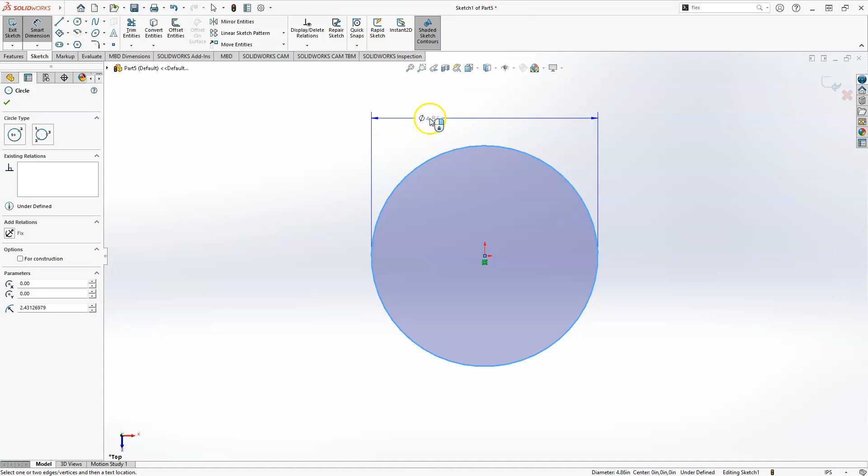Start by sketching from the top plane, create a circle with a 6-inch diameter. We are going to emboss it for 1/8 of an inch. Click OK, and then click on the top plane, go to sketch mode.

Another circle with a 1-inch diameter—that would be the shaft of the compressor. So we go to extrude mode and make it 2 inches.

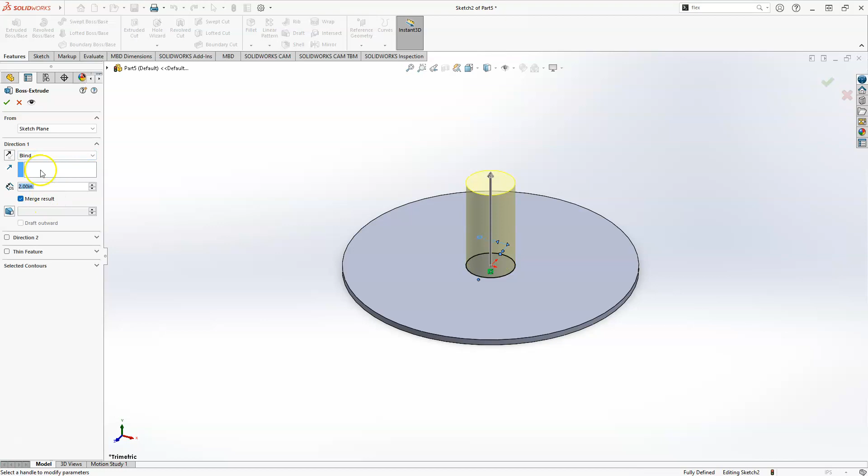Now again, click on this top plane—not top plane, top surface of the disk. Go to sketch mode, and here I'm going to draw a rectangle that's sort of angular. So from the drop-down of the rectangle shape, select a 3-point corner rectangle.

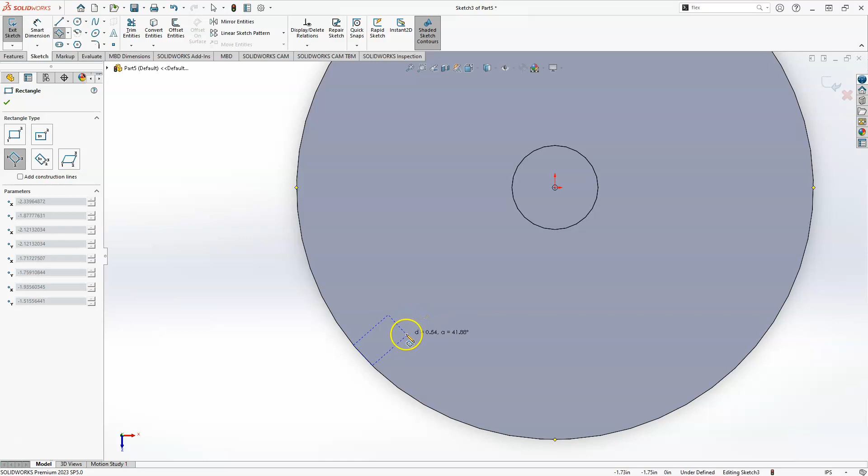Off of this I'm going to pick this one and then another. So the first two points would be on the perimeter of this circle, and the third point could be anywhere here. Now go to Smart Dimension.

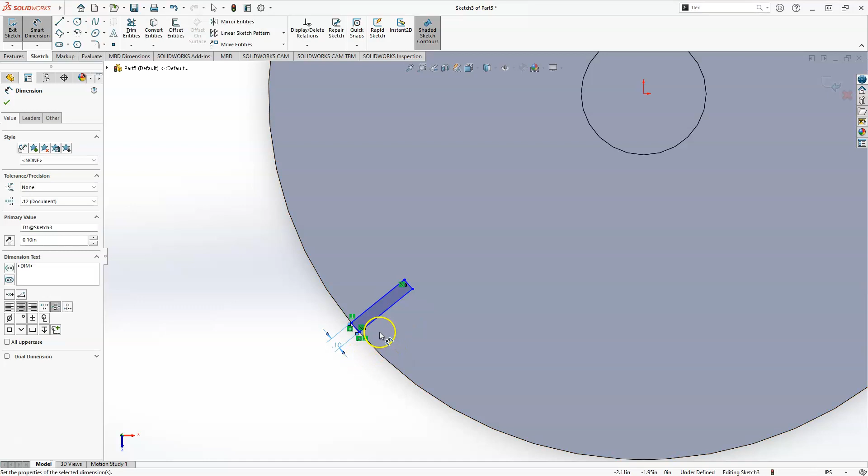I would like the width of this rectangle to be 1/10 of an inch. Hit escape, select this side—not the point, the side—and the other one, make it equal. So that would essentially be a square of 1/10 of an inch dimension on each side.

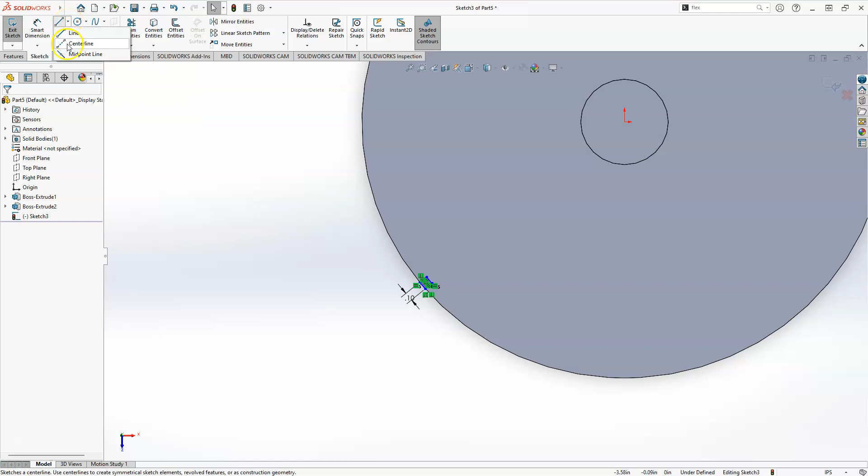Now go to the line and pick the center line. We would like to select the midpoint of this square and go all the way to the center of this circle.

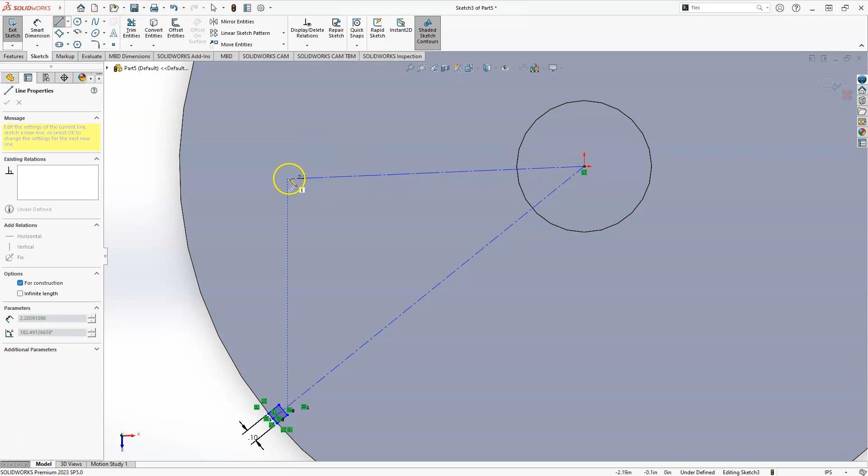Then another center line from the center, horizontal—see, it's horizontal—and hit this point of the circle. Now go to Smart Dimension. I would like the angle between these two to be 45 degrees.

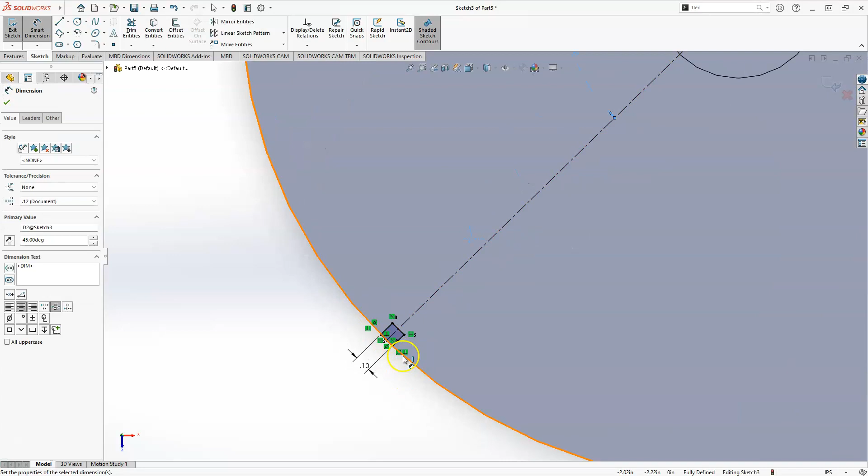Okay, now you have a fully defined sketch. Exit out of the sketch view, and you should have something like this formation.

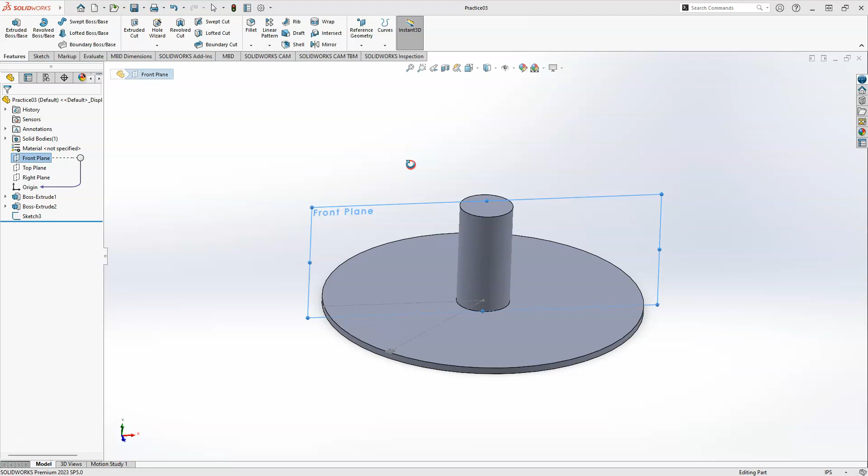Okay, we are going to select the front plane, go to reference geometry, select plane, and give it 1/10 of an inch in the forward direction. The front plane should be in the back. Hit OK. Now you have this plane here.

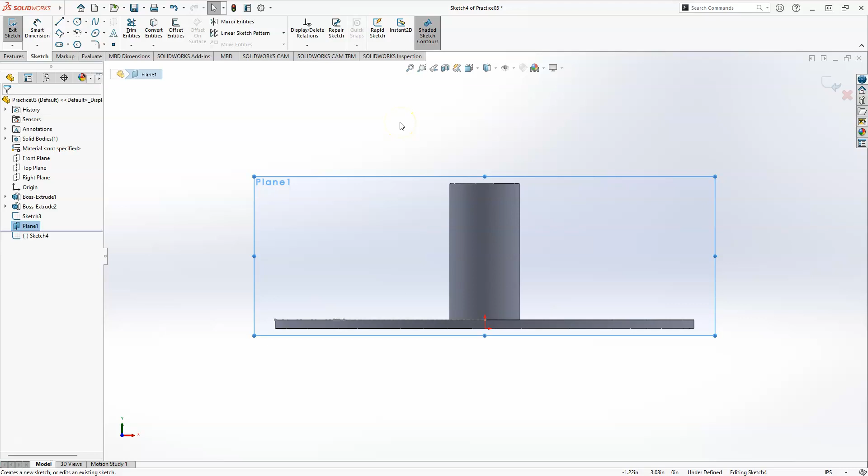Now select the plane and go to sketch mode. We are going to create a curve which would indicate the end profile of that. You will see the result—what is it going to look like?

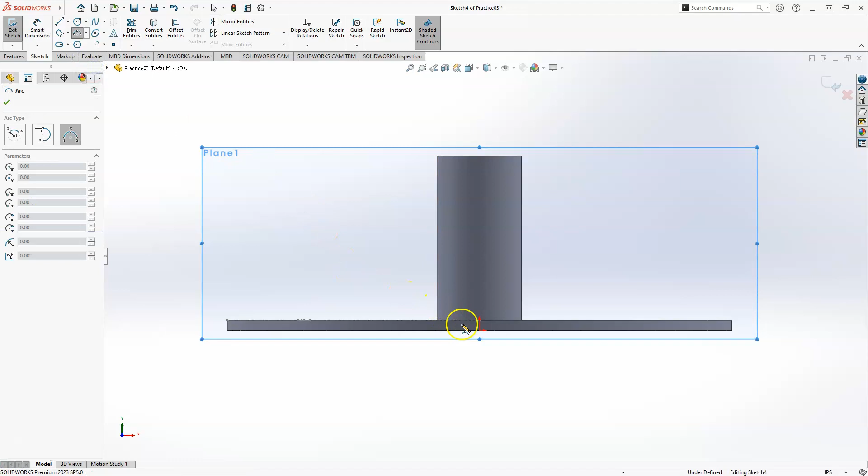So from the curve point, go ahead and select the 3-point arc, and then come here, select the point around here, and go all the way, select here, and give it some nice curvature at this point.

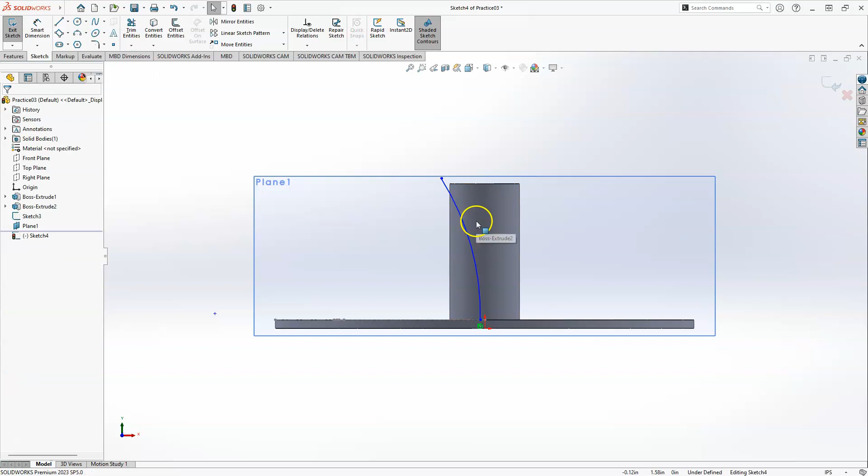And then we are going to create another curvature with 1/10 of an inch. So instead of creating another curve, you can select this sketch and go to offset entities, then give it 1/10 of an inch, and select the end cap option, and off of the end cap, pick up the line option.

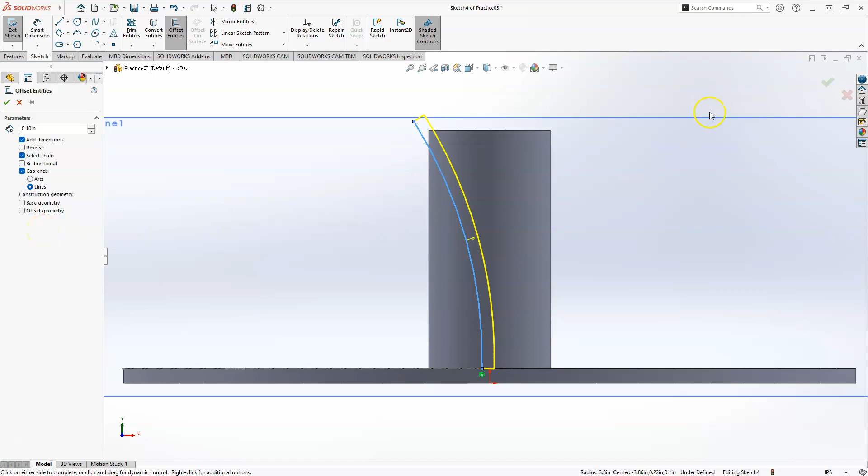Hit OK. You see that SolidWorks automatically creates a sort of cap at the end, and then all the way to here. Let's hit OK. Now we are going to give it some dimension.

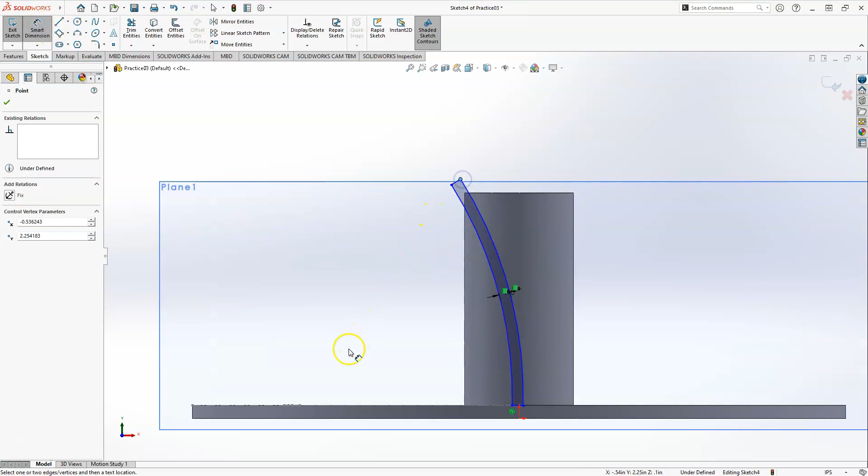I'm going to pick up the top and then this one and create it as 2.5 inches, and then make the radius of this curvature about 4.

What else is remaining to define it? Oh, the left and right. So what we are going to do is create a center line and make it vertical for construction, infinite, and put it right in the origin of the drawing.

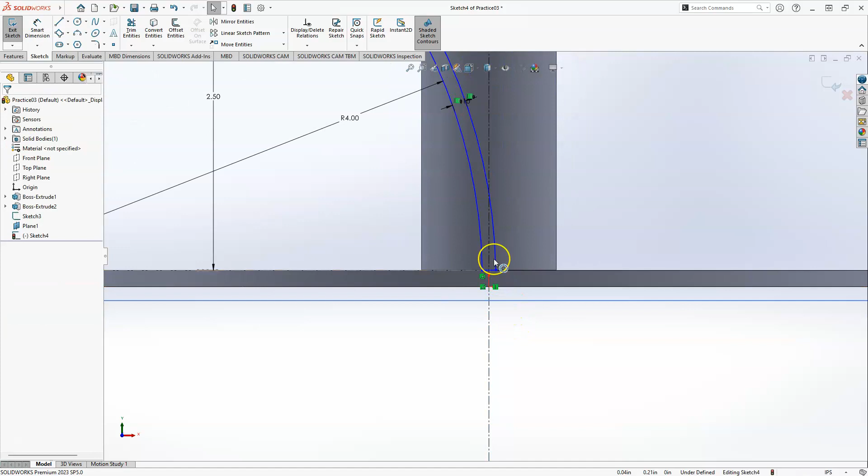And then we would like to create this line centered over this center line, so it crosses right about the center. What else is remaining? I think the radius is given.

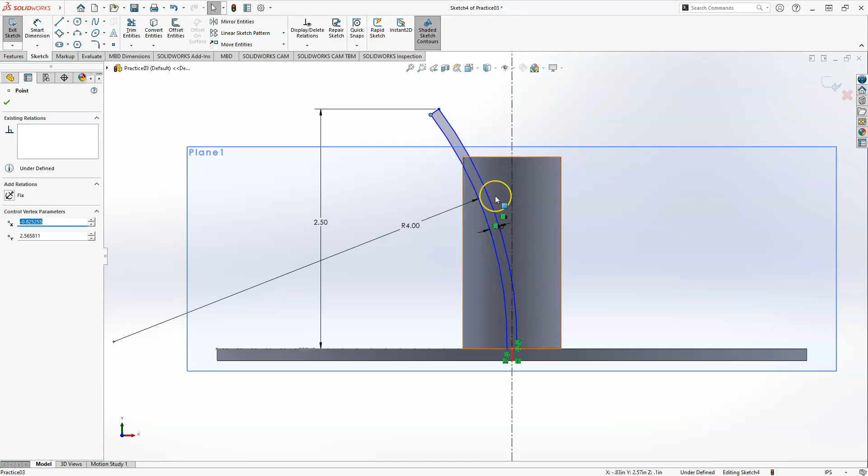Okay, this one, pick the center point, and this one—they should be coincident with each other. There you go. Now this curvature is defined.

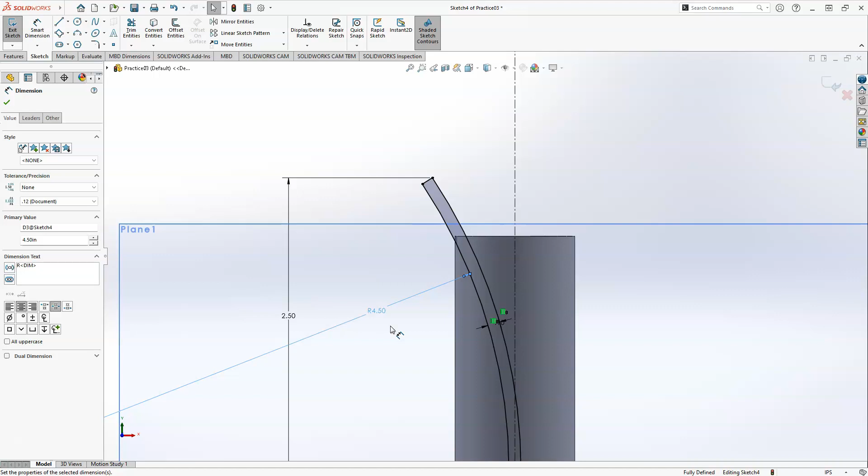I would like to create the radius like a 4.5 or maybe 4.25. Yeah, I want to make sure that this corner point kind of falls in the center of this curvature that we have. Okay, that should be good enough.

Now go exit back out of this sketch. We should have something like this.

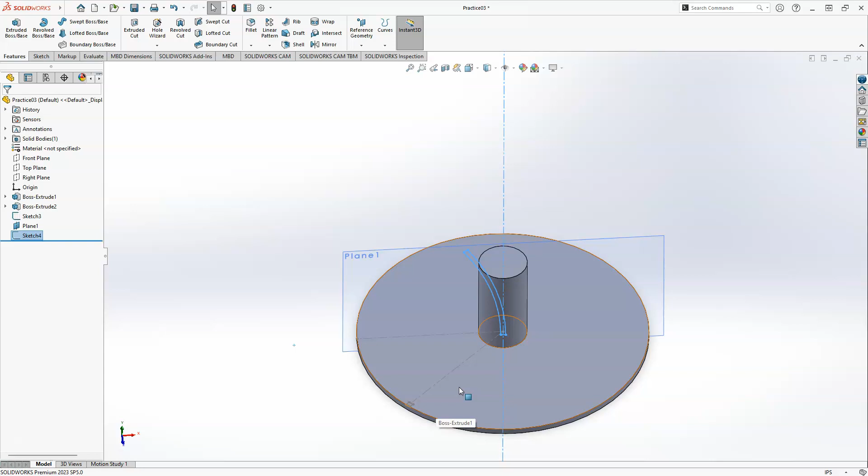Now I'm going to create a guide curve of this point. So what I would like to happen is I want this point to have a transition and reach out to this point. So I'm going to select the top plane and go to sketch mode, and for sake of better drawing, I shifted like rotated into a more 3D view.

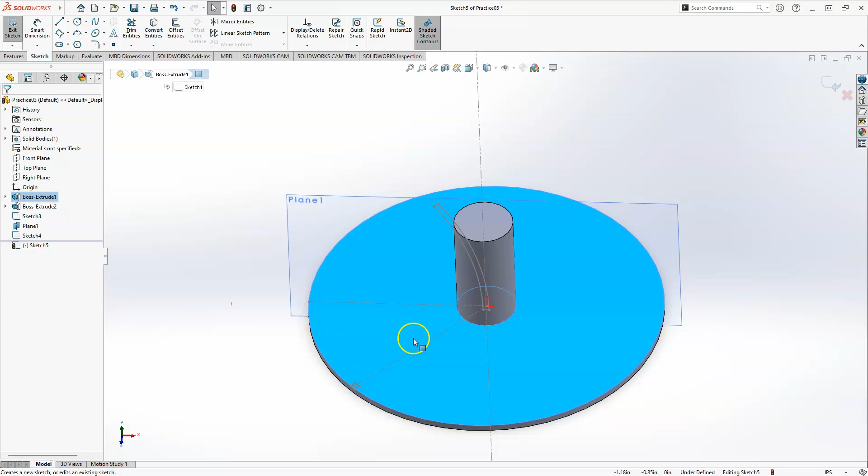You are still on the same plane but in an isometric view. Go ahead and select a 3-point arc, select this point and then another point on the profile, and give it a nice curvature here. I would like to give it a 2.5 radius, so make the radius 3, like a little more, or 2 inches. So 2-inch radius, and then it's fully defined because the radius and 2 points is given.

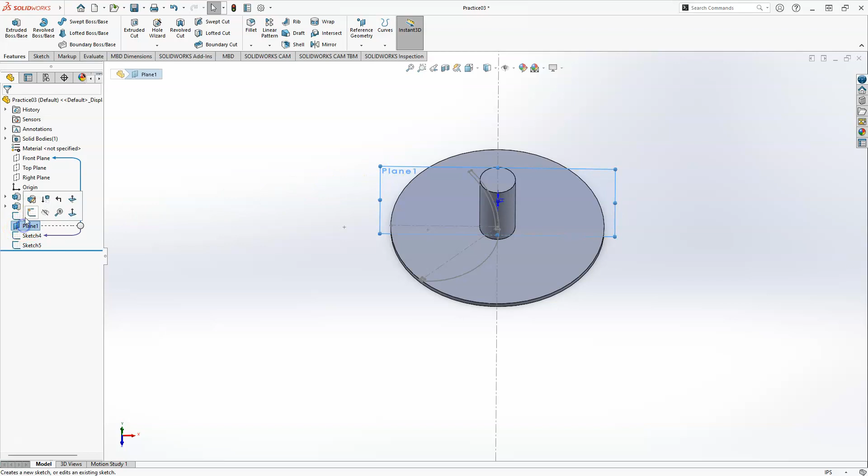Exit out of the sketch. Now go and hide this plane. So now you have two sketches on 2 different planes and a guide curve, which is the transition curve from one profile to another.

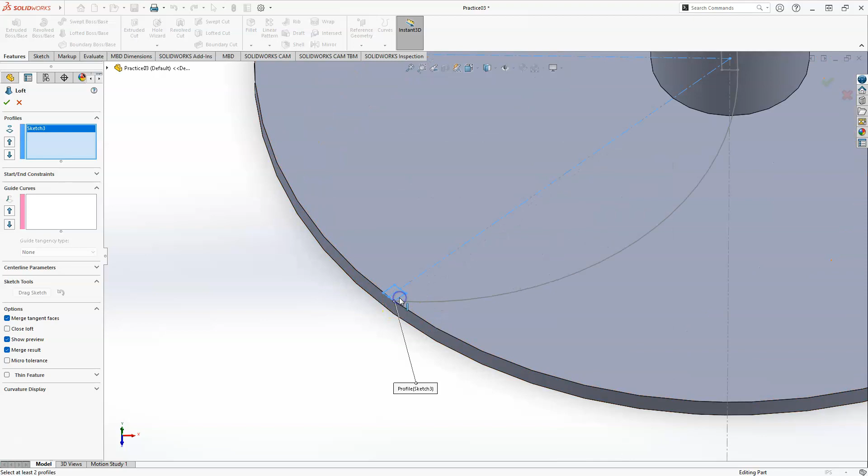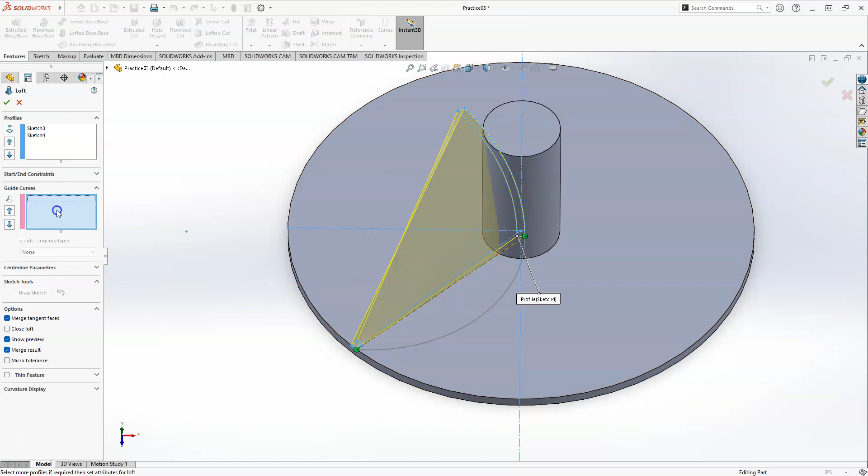Go and select Lofted Boss/Base, and for the profiles, select this sketch and this sketch. You are going to say this point is going to transition and reach to this point. But as you will see, this is straight and it's not something that we wanted. So in the guide curve, we are going to select this one. You will see it's going to make a very nice curve from one profile to another.

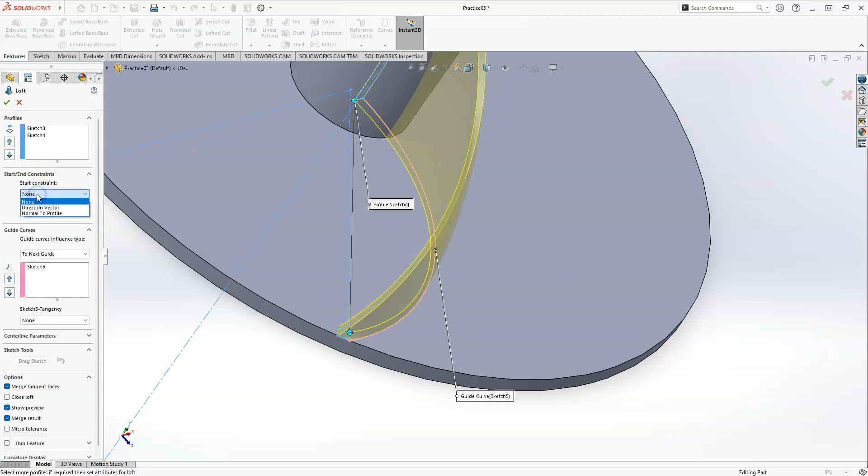So you can select sort of a constraint. Let's try it. For a start, if I select normal to profile, it's going to be here. It's going to get normal to profile, and for the end one, end constraint, make it normal to profile too - this kind of graph. So hit OK.

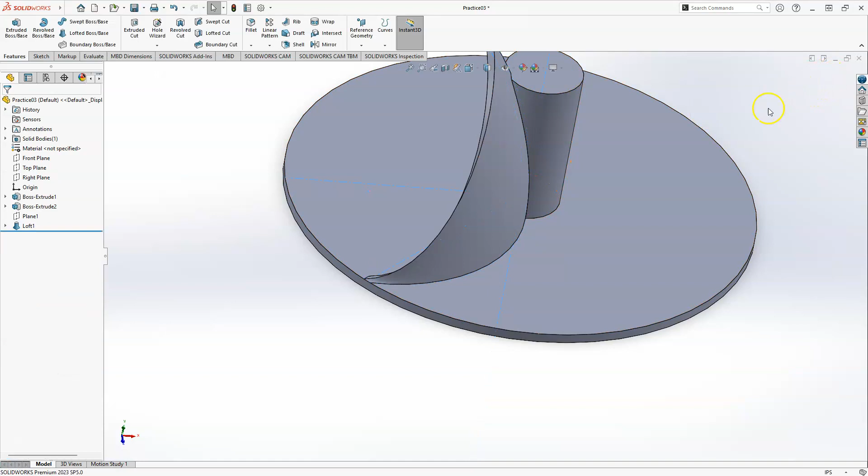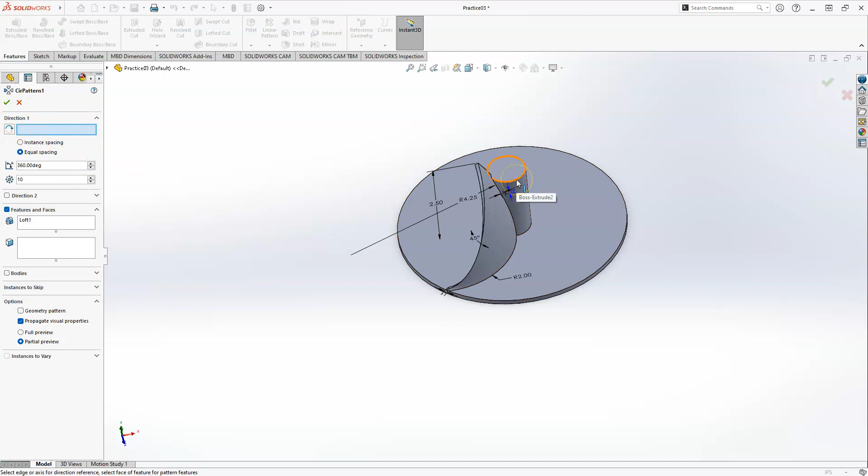And then you create one of these. Now we are going to create a circular pattern. Create loft feature, then go to this drop down. Instead of linear pattern, select circular pattern, and it will ask you for what is the reference for making that direction. You can select this circle on the top and make it 360 degrees and 10 instances, and essentially SolidWorks creates 10 instances of that body. Hit OK, and you have something similar to this shape.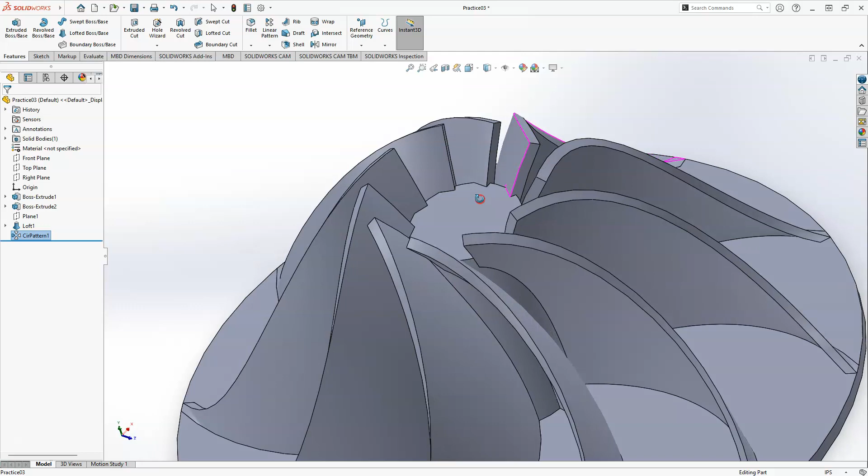Now we have to cut off the edge and make it nice and clean. So in order to do that, I would like to create a section view, and I go to here and create a section view. That gives you sort of what it looks like when you cut it, and the shape is nice here.

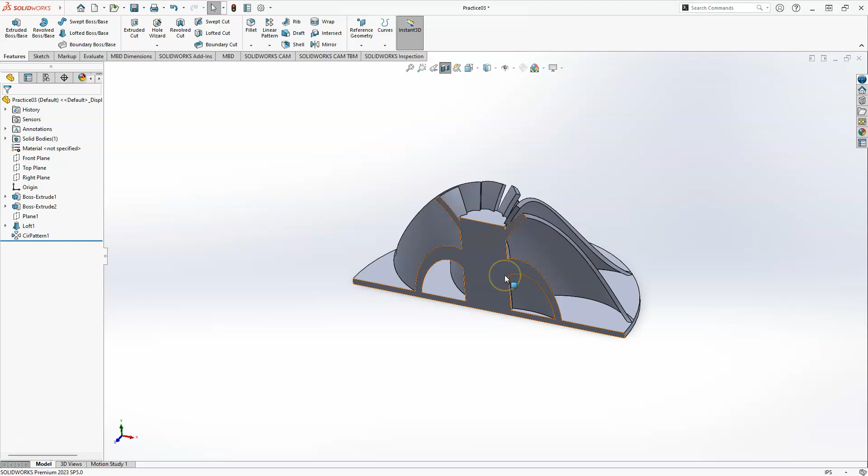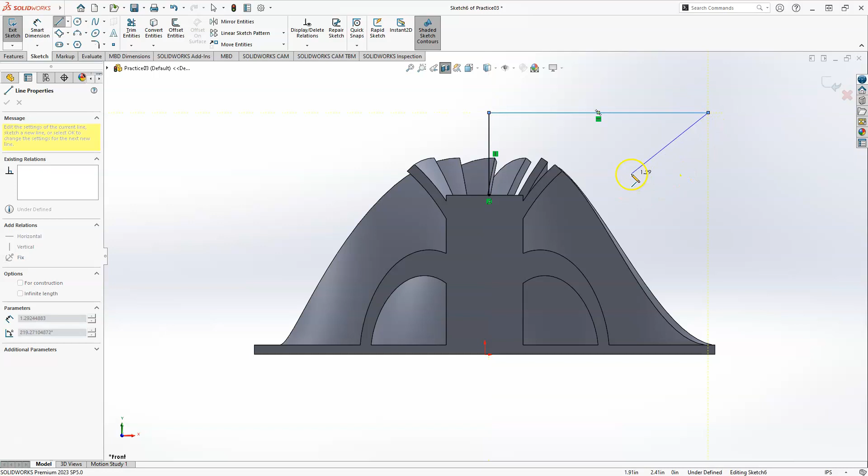So I'm going to create a revolving cut feature. I select the front plane, go to here, and I'm going to cut off all of these lines here. So what I would like to create a cut feature, I'm going to select line, and it's going to be from here to this one, then come here, then there is another line from here going to this point, right on the edge of this point.

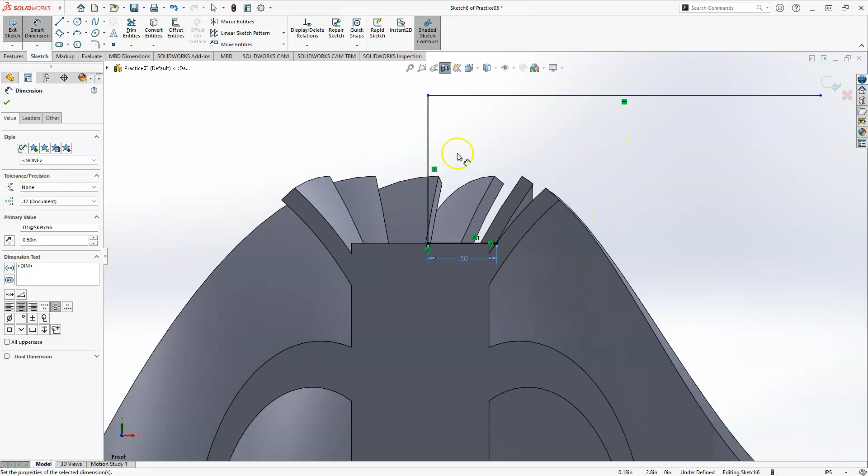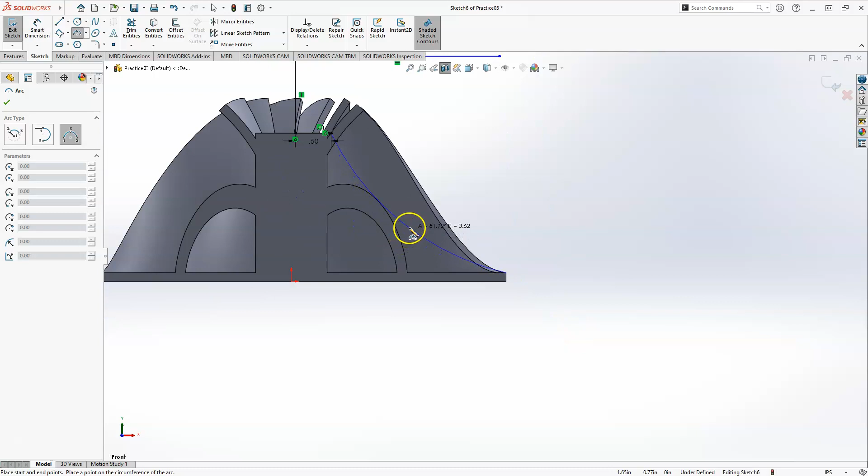But we should know that this should be half an inch because diameter is 1. Now I'm going to go to 3-point arc one more time, select the end point here, and I would like to come and cut it all the way to, let's say, this point, and give it a nice curvature like here.

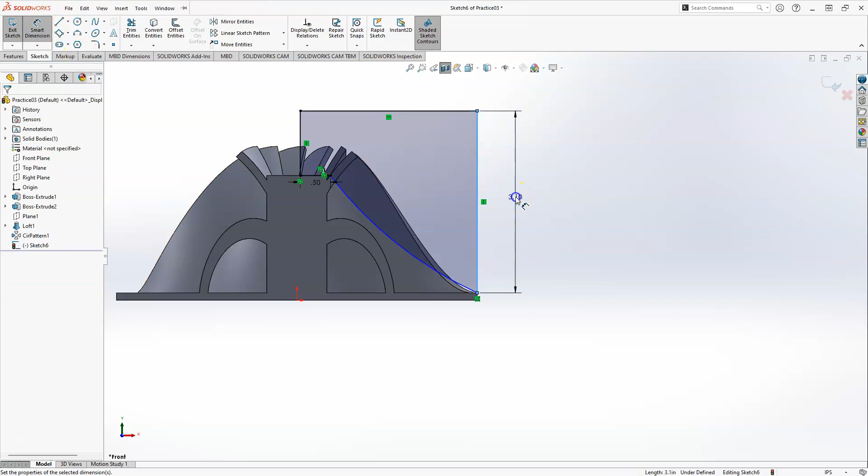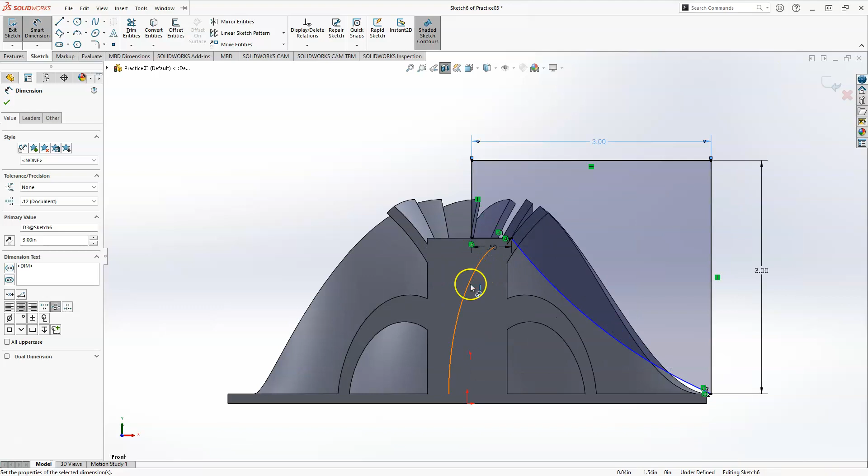And then there should be another line from here to this point, and then make this one vertical. You can give it some dimension to make sure that it's nice, like 3 here, and here would be 3, to make sure that it's going to sweep the entirety of this, since this is like 6 inches. So one thing I have to note is I feel this is not in the center, so maybe I have to create a center line. Vertical construction for infinite - yeah, my suspicion is correct.

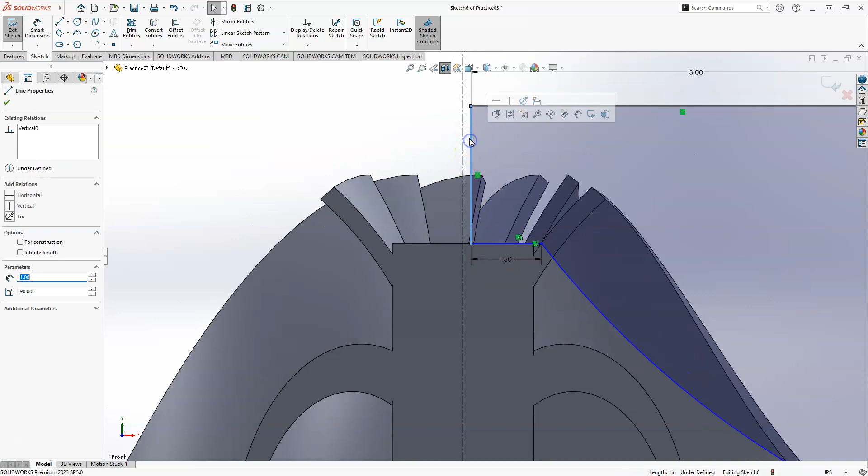So this point is not necessarily the center of this, so I clean this relation for the coincidence and make this center line to be adjacent. Then make this line to be horizontal. Now the sketch should be fully defined.

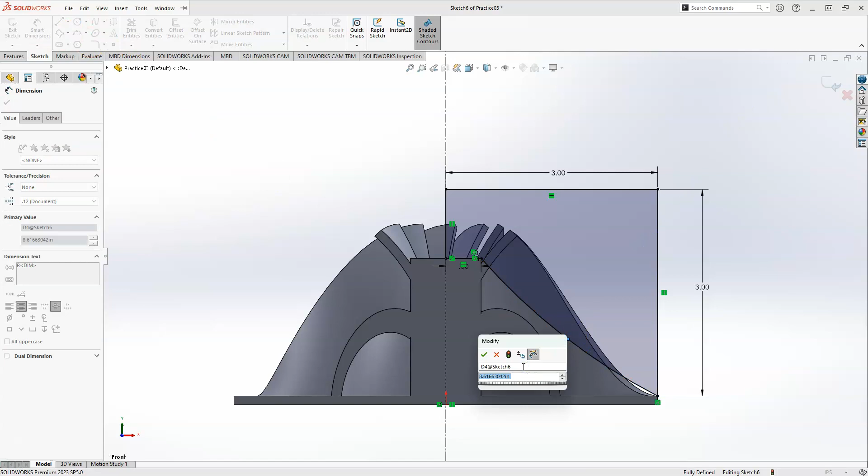Oh, we need the - if this is going here, yes, I'm going to create it, make it 8 radius, and we will see what result comes out of it.

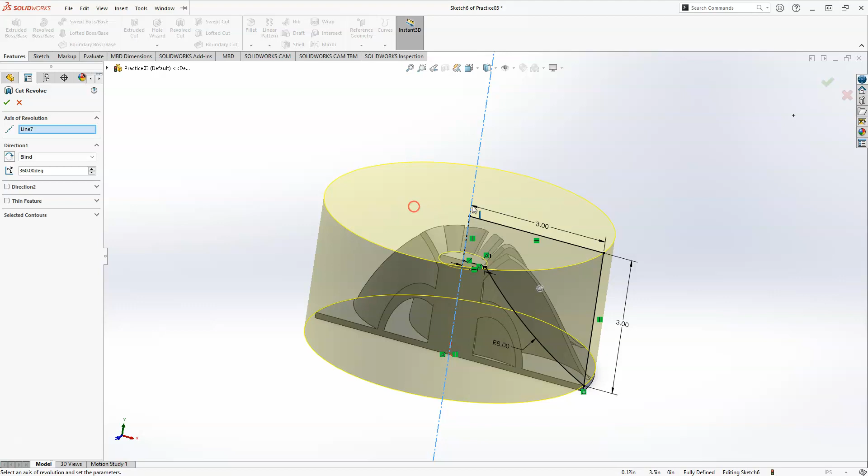Now you have created a profile that is going to rotate around this axis to make a cut. So go to feature, revolve cut, and let's pick up that profile, and that center is going to make a cut. And if I go back, you have this...